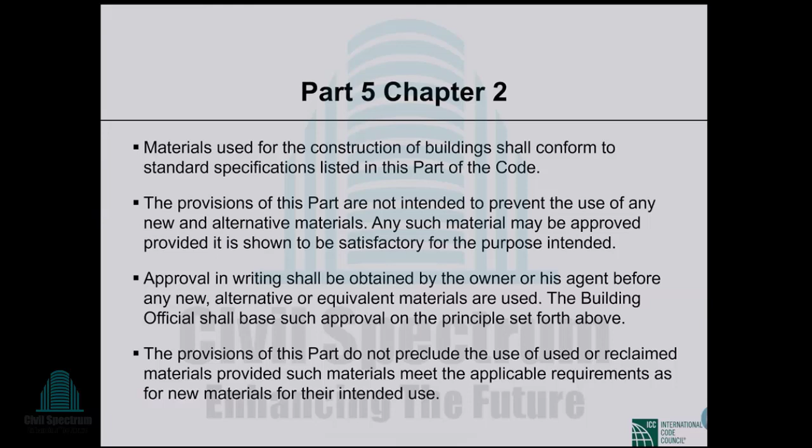Now I'll first discuss the constituents of concrete, the ingredients of concrete.

I'll start with the aggregates, fine and coarse aggregate. In the first paragraph, the standards are mentioned as they're mentioned in part 5, chapter 2. So we have some Bangladesh standard, ASTM, for normal weight concrete, normal weight aggregate, lightweight aggregate, and other types of aggregate like radiation shielding concrete, which we need for nuclear power plants, etc. Both ASTM and Indian standard are also mentioned there.

So basically we follow ASTM C33. We'll discuss on that, but it's a very common criteria that has to be followed.

This is the second one, nominal size. Nominal maximum size of coarse aggregate shall not be larger than certain limits. This is textbook information, we all know this, but it is specifically mentioned in the code, even in ASTM C33. Again, it is mentioned in 2 places in our building code: part 5, chapter 2, and part 6, chapter 5.

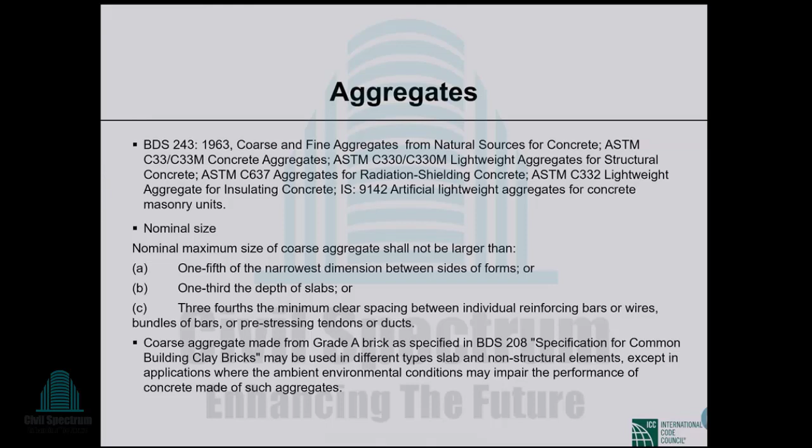Now let's talk a little about ASTM C33 for fine aggregates. These conditions are there that the deleterious materials should not exceed these limits. Like clay lumps and friable particles should not exceed 3% of the mass. Coal and lignite, where surface appearance of concrete is of importance, should not exceed 0.5%. All other concrete, 1%. In very few cases we actually do the tests to check if the deleterious materials exceed these percentages, but for important structures we should.

Then the fine aggregate shall have not more than 45% passing any sieve and retained on the next consecutive sieve, and its fineness modulus shall not be less than 2.3, not more than 3.1. This is important. When we conduct the sieve analysis with standard size sieves, this condition ensures the fine aggregate should not be uniformly graded, that is, most of the aggregate particles are of similar particle size. In that case we call it uniformly graded, not well graded.

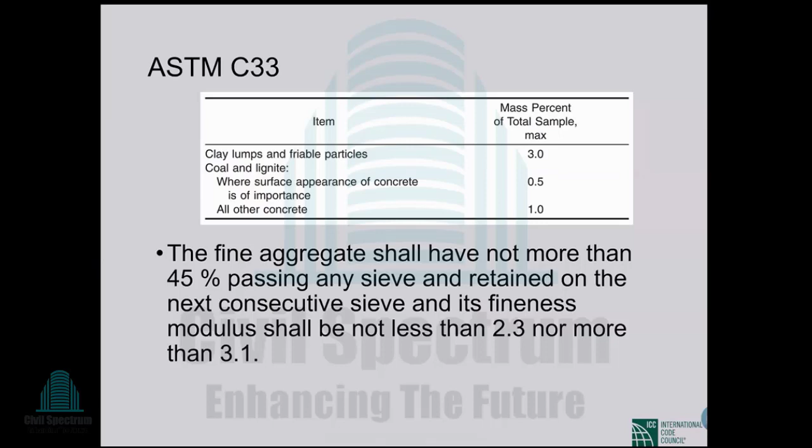Now in ASTM C33, there are different numbers related to coarse aggregate. There are different numbers of coarse aggregate.

In our case, they have wide variations in size. We usually use 20 milli downgrade size, and the gradation should follow the range among the sieve sizes. Or in some cases, we use half-inch downgrade or 12.5 milli downgrade, and the gradation should follow this as well.

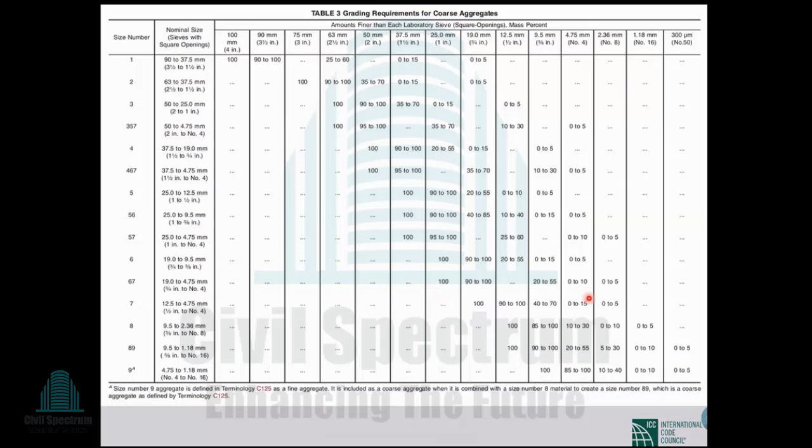But we seldom check this. In most cases, we use a crushing machine to break the coarse aggregate, which could be brickbats or stones. In many such cases, the gradation is not appropriate, so we should check the gradation by sieve analysis. So in brief, that was about the aggregates.

Of course, you have to check the aggregate quality, but you all know about those things, so I'm skipping that. The more important constituent ingredient is cement.

So what does the code say about cement? The code mentions both BDS standard and ASTM standards, that we can use cement made following these standards, so BDS or ASTM. In other words, we can test the cement following EN test specifications or ASTM test specifications. So if the cement passes any of them, the code says it's okay.

But there is a big problem. In Bangladesh, our BDS standard is BDS EN 197.1, meaning the manufacturers follow only this standard, not ASTM C150 or ASTM C595. But in the field or for designing, as we design following BNBC, which actually comes from ACI, we follow the American standards for design. So we want to test the cement following ASTM standards.

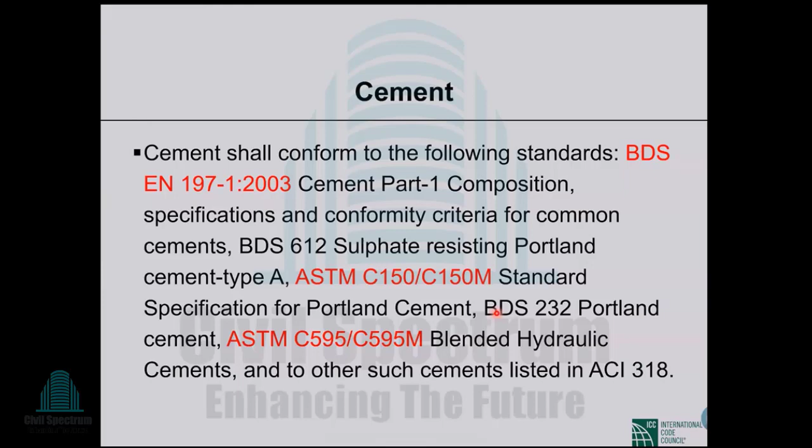So there is a gap. The manufacturers follow the EN standard, and the engineers follow the ASTM standard. So what are the differences in these standards? We'll talk about that.

In the BDS EN standard, there are 5 types of cement: CEM 1, 2, 3, 4, 5. But in our country, only two types are available, CEM 1 and CEM 2. CEM 3 has been used in the Rooppur nuclear power plant, but it's not usually available, and CEM 4 and CEM 5 have, I think, never been used in Bangladesh. So basically, it's CEM 1 and CEM 2.

CEM 1, Portland cement, is usually called ordinary Portland cement, OPC. CEM 2 is Portland composite cement, called PCC. These two types are mostly available in the market under different brand names.

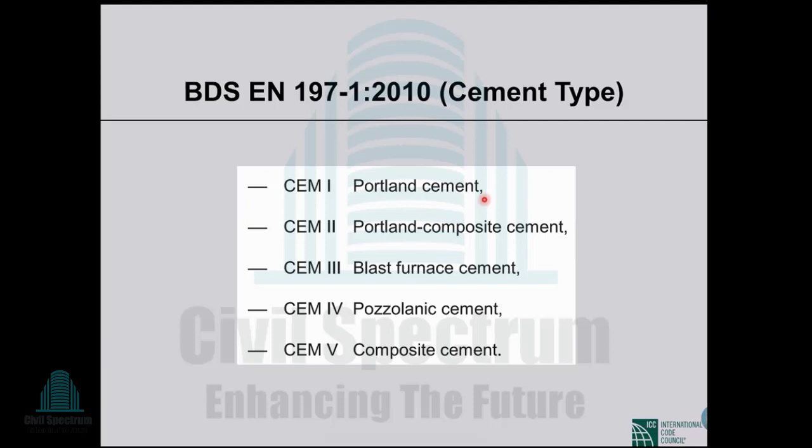So how do we classify CEM 1 and CEM 2? CEM 1, as mentioned, is ordinary Portland cement, containing mostly more than 95% clinker. This is the cement we used to have previously, produced from clinker as you've studied in your engineering course. In CEM 1, ordinary Portland cement, most of it is clinker with very few other additives.

But PCC, Portland composite cement, contains other types of additives. These could be blast furnace slag, silica fume, different types of pozzolans, different types of fly ashes, burnt shale, or limestone. In Bangladesh, Portland composite cement usually contains blast furnace slag, fly ash, and limestone.

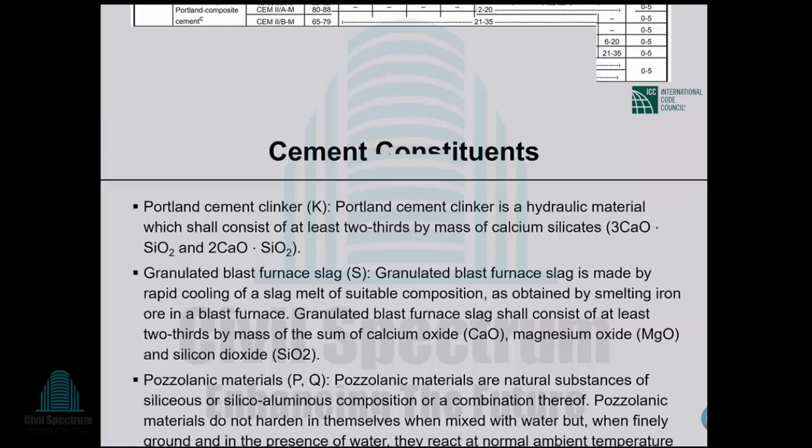I have added a few slides. Probably the version of slides you have downloaded from the web page doesn't have these slides. Anyway, these are just called from the BDS EN standard, so you'll find there too.

Portland cement clinker, what is this? In cement clinker, the major compounds are calcium silicates, so tricalcium silicate or dicalcium silicate. These are the major compounds in cement clinker, which is produced by burning different types of oxides with limestone. There is a fixed procedure and certain mix of ingredients that will produce clinker.

So this is cement clinker, granulated blast furnace slag. Now, what is blast furnace? We don't have blast furnace in Bangladesh. Blast furnace is the furnace which is used to produce steel from iron, iron that is extracted from ore. We don't have any iron ore in Bangladesh.

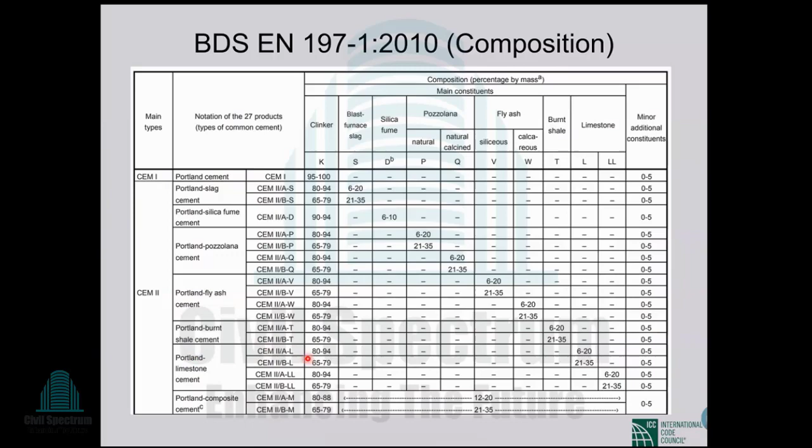Limestone - used in some types of cement. In many cases, the cements have limestone, where it is written VSL, L standing for limestone. Another kind of cement available in Bangladesh is called PLC, Portland lime cement, where the lime content is more. That is similar to CEM II A-L or B-L, that is Portland limestone cement, PLC, also similar but the main additive is limestone. One company in Bangladesh produces PLC.

So in case of limestone, there are some specific compositions required - calcium carbonate should be at least 75% in the limestone, and organic carbon should not exceed certain amounts for different types, for LL type and L type.

Silica fume is produced while manufacturing silicon. We don't have a silicon industry in our country, that's why we don't have silica fume, and it's not very cheap. So it is seldom used in cement manufacturing in our country.

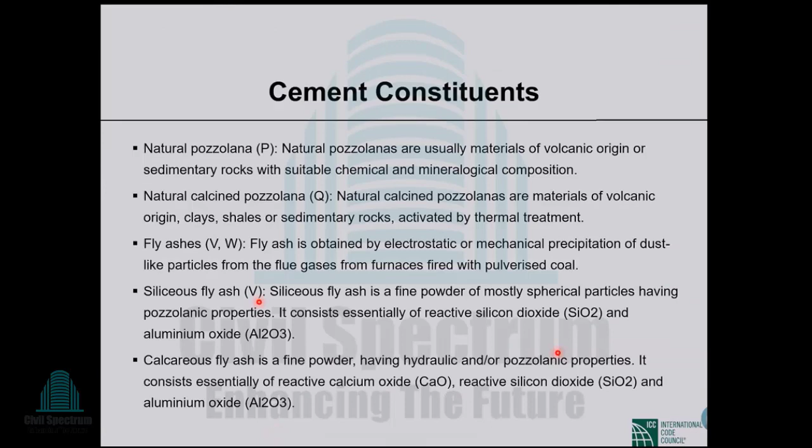So basically in Bangladesh, these additives are used: V, siliceous fly ash; S, which is blast furnace slag; and L, limestone. So these are the constituents.

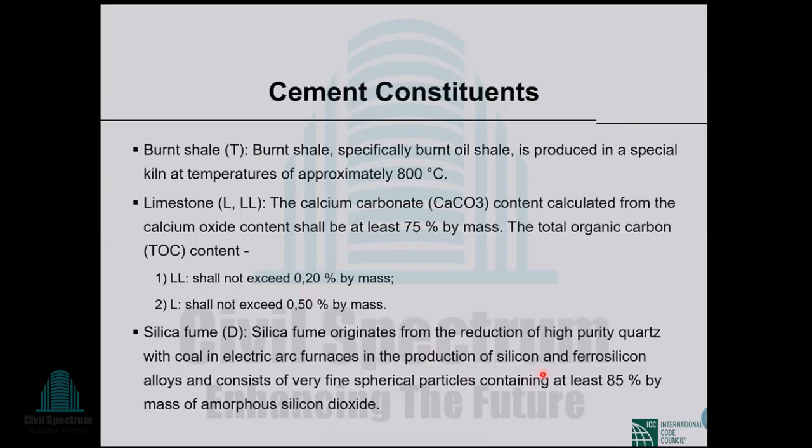Now, BDS-EN classifies cement in different strength classes: 32.5, 42.5, and 52.5. In European style, instead of a point, they use a comma. So 32.5, 42.5, these are the strength classes. In Bangladesh, both 42.5 and 52.5 strength classes are available.

And there are these letters N and R. What do they mean? In most cases you'll find this number, 42.5 N. N means normal or ordinary. R, we don't have R - R means rapid, for rapid early strength gain, this is the class, 42.5 R. For ordinary, when you don't need early strength gain, that is ordinary.

In some cases, only for CEM 3, there is another class denoted by L, which means low early strength gain. Blast furnace CEM 3 is blast furnace cement, Portland blast furnace cement. So in that type of cement, this low early strength gain type is available.

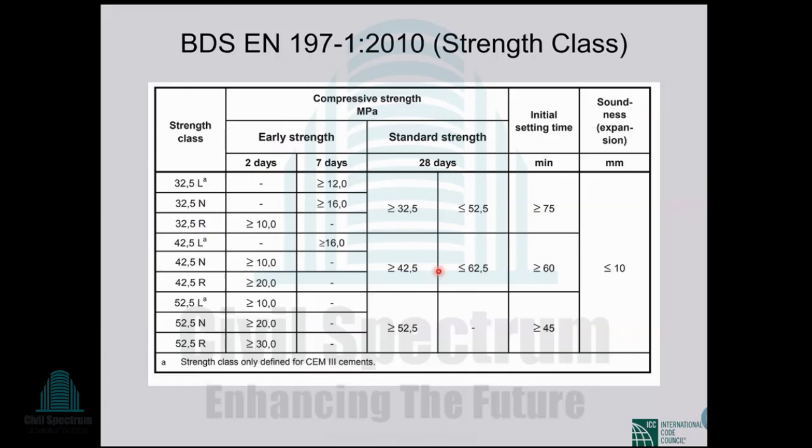Now, that was all about BDS-EN, but in practice we follow ASTM C150. In manufacturing, BDS-EN is followed; in design or construction, ASTM is followed. In ASTM, there are two standards - one is ASTM C150, another is ASTM C595. So what are the differences?

ASTM C150 is on ordinary Portland cement, OPC. It is just termed as Portland cement. ASTM C595 is actually related to what we call CEM2, that is Portland composite cement. In ASTM terminology they don't call it Portland composite cement, they call it blended hydraulic cement. So the terminology is different, but you can compare that with CEM2.

For ordinary Portland cement, there are many varieties mentioned in ASTM C150: Type 1, 2, 3, 4, 5, and all of them have another type like Type 1A, Type 2A, Type 3A, Type 4A.

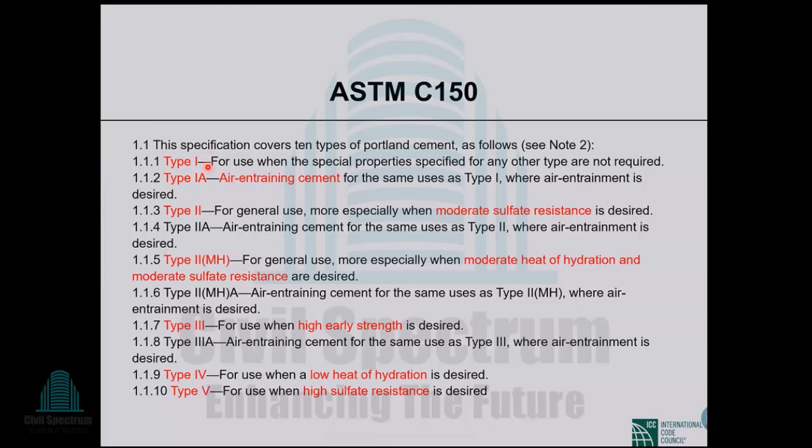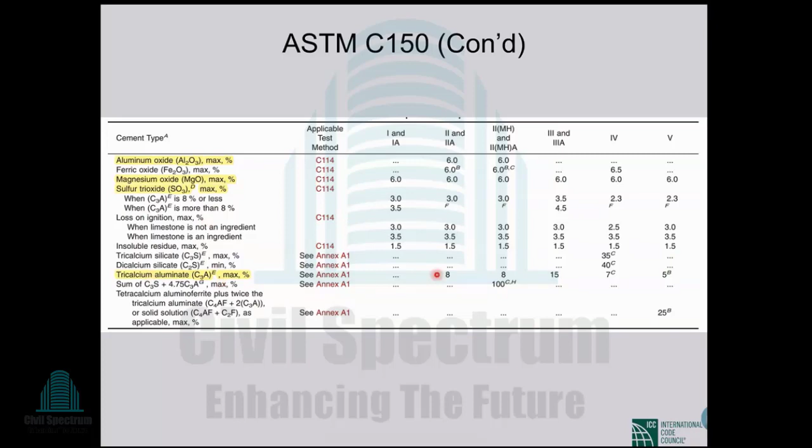Now the chemical composition of these different types of cement is specified as shown in this table. For Type 1, the maximum percentage of alumina, maximum percentage of magnesium oxide, or maximum percentage of other compounds are mentioned here, along with properties like fineness and expansion.

Among the properties, compressive strength is the most important one that is most often tested. In ASTM, both 3-day and 7-day strengths are specified for different types. For example, in our case, Type 1 is equivalent to CEM1.

In EN there are two varieties of CEM1, 42.5 class and 52.5 class. CEM1 is always 52.5 class, so the 28-day strength of CEM1 must be greater than 52.5 MPa. But in ASTM, 28-day strength is not specified; instead 3-day and 7-day strengths are specified. For Type 1, 3-day strength must be more than 12 MPa, and 7-day strength must be greater than 19 MPa.

So this is interesting. Another difference is the setting time. Both initial and final setting time are specified in ASTM, but in EN only initial setting time is specified; final setting time is not specified. In EN for CEM1, that is 52.5 strength class, the minimum limit of initial setting time is 45 minutes. Here it is the same.

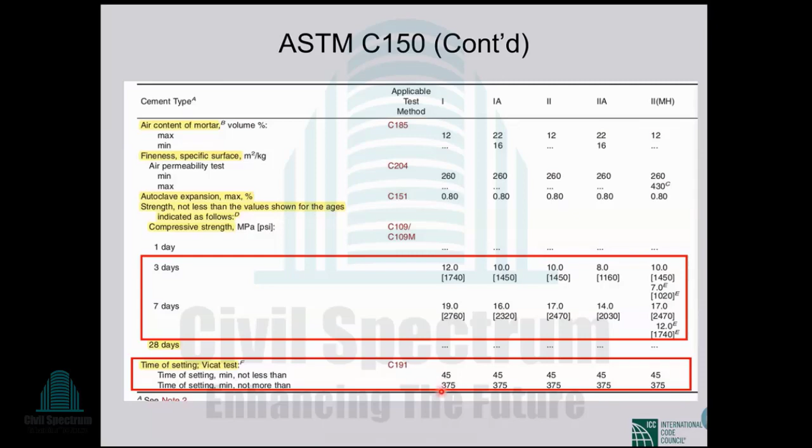We do a lot of tests in BUET. In many cases we find that even reputed cement companies have problems maintaining this final setting time, because in their manufacturing process they follow EN, and EN doesn't have any limit on final setting time. So when they test their cement according to EN protocols, they don't find any problem. But when those cements are tested following ASTM, strength-wise they usually don't face any problem, but the final setting time in many cases exceeds this value of 375 minutes. That is the problem.

ASTM C595 is related to blended hydraulic cement, which you can compare with CEM II according to the EN standard. In blended hydraulic cement, there are different types. In EN standard, you have CEM II A, CEM II B, and many variants depending on the additive, such as CEM II A-S, CEM II B-S, CEM II A-L, CEM II B-L, CEM II A-M, CEM II B-M, etc.

ASTM classifies these into 5 classes. Type IS is Portland blast furnace slag cement, where the slag constituent is between 25 and 70%. By slag, ASTM always refers to blast furnace slag, not any other type. So it should be between 25 and 70%, a very wide range. When slag is mixed with clinker and cement is produced, that is called Portland blast furnace slag cement.

Portland pozzolan cement is when other types of pozzolanic materials are used. The percentage of pozzolan can be from 15 to 40%, again a wide range. Portland pozzolan cement is for use when higher strengths at early ages are not required. That is like CEM II - you can compare with cements available in Bangladesh, which are 42.5N or 52.5N. CEM II most of the time is 42.5N, which you can compare with this type P, Portland pozzolan cement for use when higher strengths at early ages are not required.

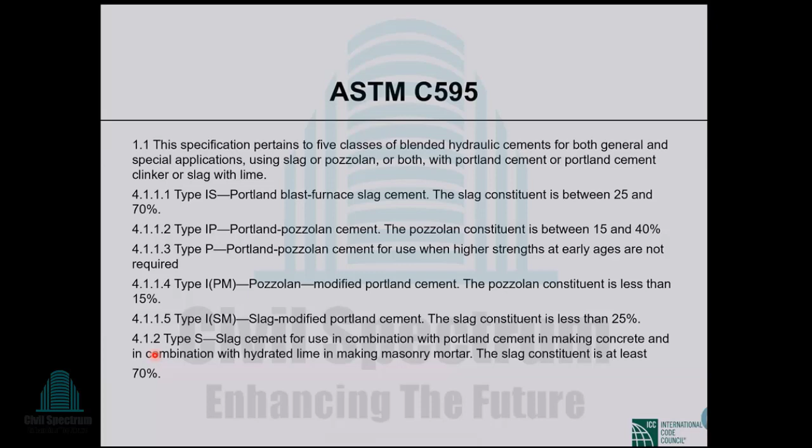So these are the different types of blended hydraulic cements that are specified. Now, blast furnace slag, as defined in ASTM C595: blast furnace slag shall be the non-metallic product consisting essentially of silicates and aluminosilicates of calcium and other bases, developed in a molten condition simultaneously with iron in a blast furnace. So while producing steel from iron extracted from iron ore in a blast furnace, the molten impurity on top of the steel - that is blast furnace slag.

Pozzolan shall be a siliceous or siliceous and aluminous material, which in itself possesses little or no cementitious value, but which will, in finely divided form and in the presence of moisture, chemically react with calcium hydroxide at ordinary temperatures to form compounds possessing cementitious properties. So it doesn't naturally have cementitious properties, but in certain conditions when there is moisture, it reacts with calcium hydroxide - this is called pozzolanic property. Hydraulic property is when a compound gains strength just by coming in contact with moisture. Pozzolanic property engages in chemical reaction with calcium hydroxide, creating a compound which has strength.

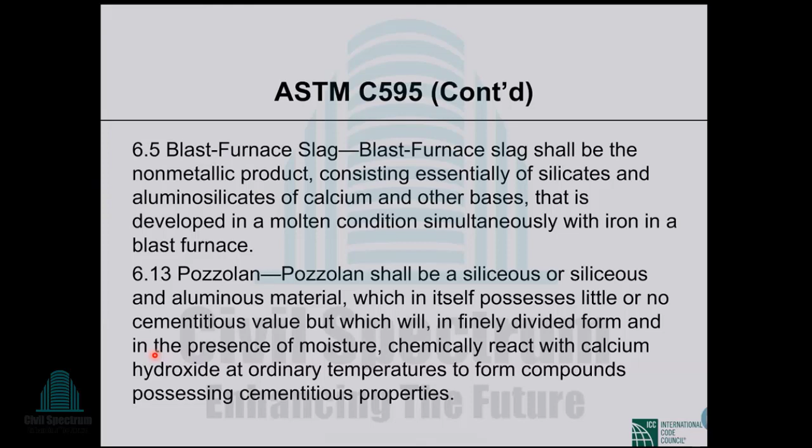So for ASTM C595, we can compare the standards: BDS EN CEM I we compare with ASTM C150 type 1, and for CEM II we compare with ASTM C595 type I, S or P. So if we compare the properties as mentioned in ASTM C595 and BDS EN CEM II type cement...

For setting time, ASTM provides limits for both initial setting time and final setting time. The initial setting time is 45 minutes, a little bit more strict than... sorry, actually EN is more strict here. In EN standard, for 42.5 strength class, the initial setting time must be more than 60 minutes. But in case of ASTM, if it's more than 45 minutes, then it's okay. The problem was the final setting time - final setting time must be less than 7 hours, which is 420 minutes.

But in the EN standard, there is no limit for final setting time. So even for CEM2 type of cement, many companies struggle to achieve this property for their cement. And compressive strength...

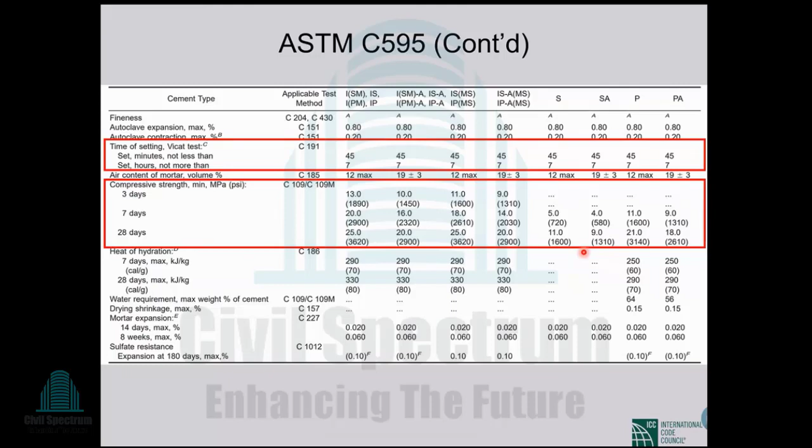So these are all about cements, two different standards, BDS EN and ASTM. Now let's talk about other ingredients.

Water, very simple. In our textbooks we always learn that water must be potable, that is drinkable. Only potable water can be used in concreting. But the code also says water used in mixing concrete shall be clean and free from injurious amounts of oils, alkaline salts, organic materials, or other substances that may be deleterious to concrete or reinforcement.

Then it says non-potable water shall not be used in concrete unless certain conditions are satisfied. So usually we will not use non-potable water; we'll always use potable water. But in certain cases we can use non-potable water - selection of concrete proportion shall be based on concrete mixes using water from such source.

So in mix design, we have to use that water and test if the properties of concrete are okay or not. Mortar test cubes made with non-potable mixing water shall have 7-day and 28-day strengths equal to at least 90% of strengths specified for similar specimens made with potable water. So if our water quality is non-potable, we can make mortar cubes with it.

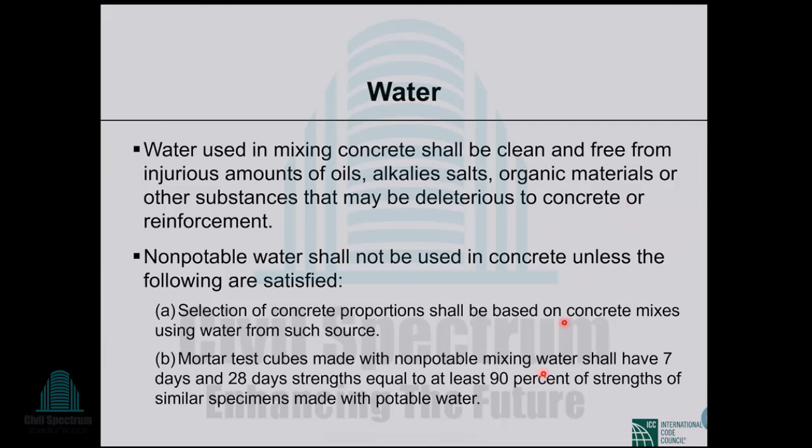Understandably, but this one holds - there shouldn't be any alkaline salt or other deleterious material. Okay, and that was about water.

Now this is another very important topic, reinforcement. So although the title of today's presentation is concrete materials, we cannot use concrete without reinforcement. So naturally reinforcement is relevant. We'll cover some important information regarding reinforcement that is mentioned in the code.

So metal reinforcement, actually steel reinforcement. Modulus of elasticity, we always take it as 200 gigapascal. That is universally true, yes.

Then the standards - again the same problem we have with reinforcement. The Bangladesh standard is based on ISO 6935-2. But the code also talks about ASTM A615. So we'll compare these two standards.

For rebars having yield strength more than 410 megapascal, that is 60 ksi or 60,000 psi, the Fy should be the stress corresponding to a strain of 0.35%. Okay, so this is what we call the offset method. By that method, we have to calculate yield strength while conducting tests.

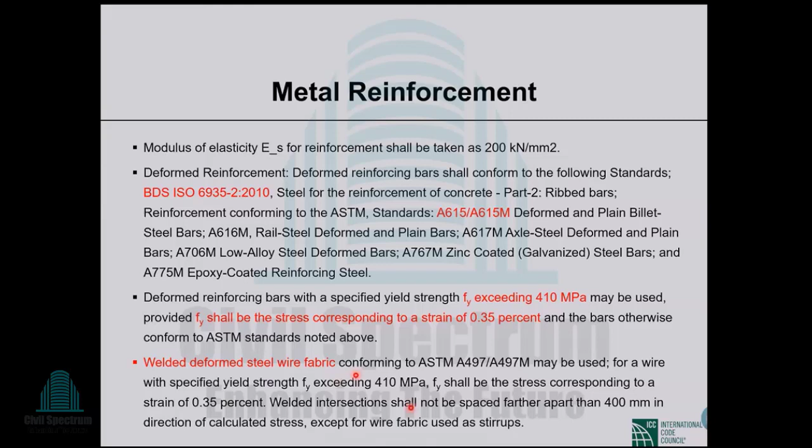So now let's talk about the standards. Our standard is based on ISO, adopted from ISO, BDS ISO 6935-2, for the bar sizes. These are the standard bar sizes according to ISO: 6 milli, 8 milli, 10 milli, 12 milli, 14 milli, 16 milli, 20 milli, 25 milli, 28 milli, 32, 40, 50.

Remember, some dias are missing here - like in some cases we used to have 19 milli, 22 milli. Those bar dias are missing in the ISO standard. In the ASTM standard, you will find 19 milli, 22 milli, etc. So the bar sizes according to ISO are different from those of ASTM. Here, the nominal cross-section area is given, and the weight, mass per unit length.

Sometimes some fresh engineers ask how can we measure the diameter, or if in the test report the diameter is a little bit less than the nominal bar dia, is that a problem? Remember, for deformed bar, we cannot exactly measure the bar diameter because there is a rib. So in some places the bar diameter is more, in some places it is less - it depends how you hold the slide calipers on the rib. So actually you never measure bar diameter directly.

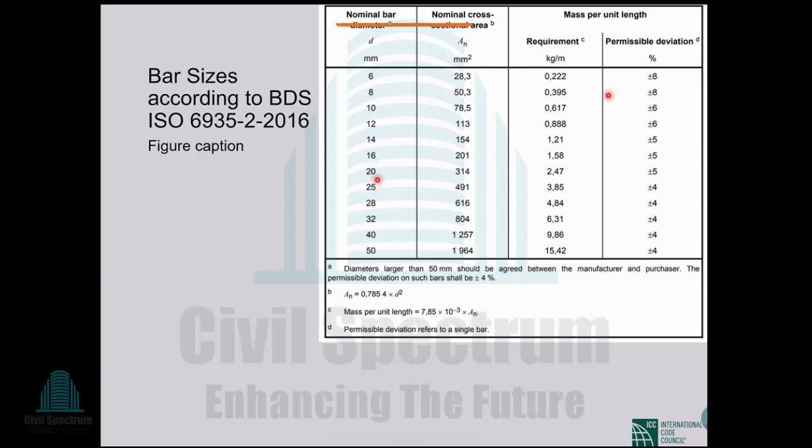That's why this is called nominal. The most important thing is mass per unit length, so measure the weight per unit length, usually for 1 meter. This is the weight, and the code tolerates this amount of deviation. If the weight is a little less, for smaller bar diameters, if it is less than 8% or more than 8% of the standard weight, then that tolerance is okay. But if it is less, you will always check the weight per unit length. If the weight is less than this tolerance, then that is a problem. Otherwise, just from the bar diameter you cannot make any assessment. Usually the diameter, if you convert from area, is always a little bit less than the nominal bar diameter, but this weight is important. So always compare the weight.

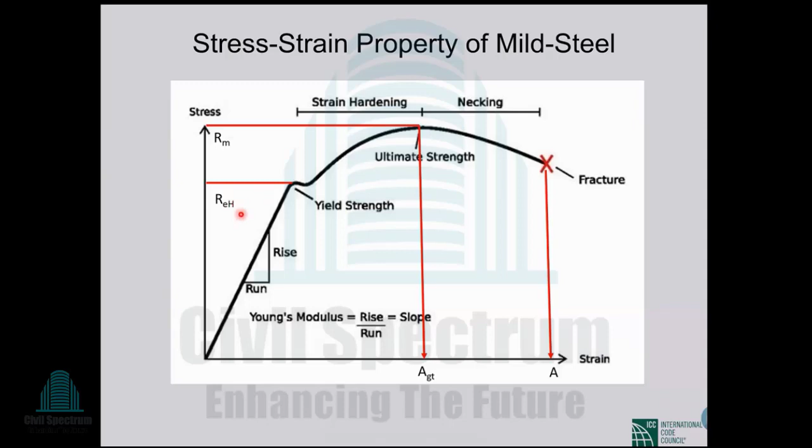But ISO doesn't define ductility in this way. It is found that the ratio Rm divided by Reh, that is ultimate strength divided by yield stress, in ASTM terminology is called the TY ratio, tensile strength divided by yield stress. This TY ratio, or Rm divided by Reh ratio, is found to correlate such that if this ratio is high, the ductility of the steel is high. So instead of calculating ductility in terms of strain, ductility is defined in ISO in terms of this ratio, Rm divided by Reh, or Ty ratio. For ductility class A, this Rm divided by Reh is 1.02, only 2% more than yield stress. Ductility class B is 1.08, ductility class C is 1.15, and ductility class D is 1.25.

In ductility class D, there is a maximum limit of ultimate strength. Ultimate strength cannot be more than 1.3 times the yield stress. So that is another point. Ductility class is all about this ratio, how ductile the steel is.

That's why we find in the market two types, B500C and B500D. B500C corresponds to ductility class C, where the ultimate strength by yield stress ratio is more than 1.15 but less than 1.25. For ductility class D, the ultimate strength by yield stress ratio is more than 1.25, for B500D or 420D. So the letters C and D represent ductility class.

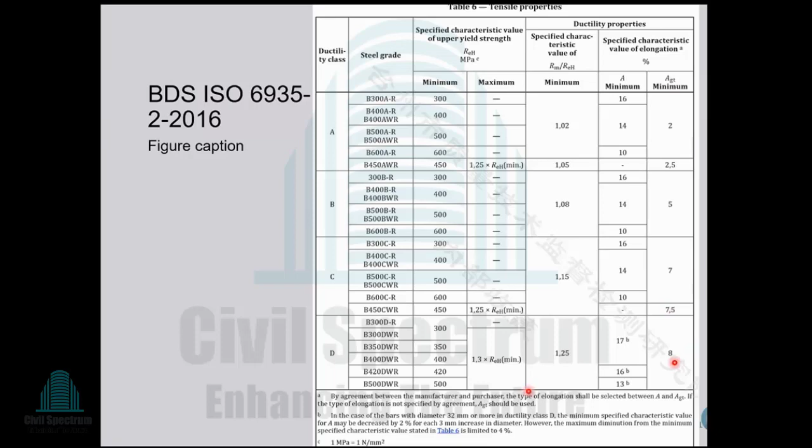So now we understand the BDS ISO standard. What about ASTM? Let's see the standard sizes in ASTM, according to ASTM A615.

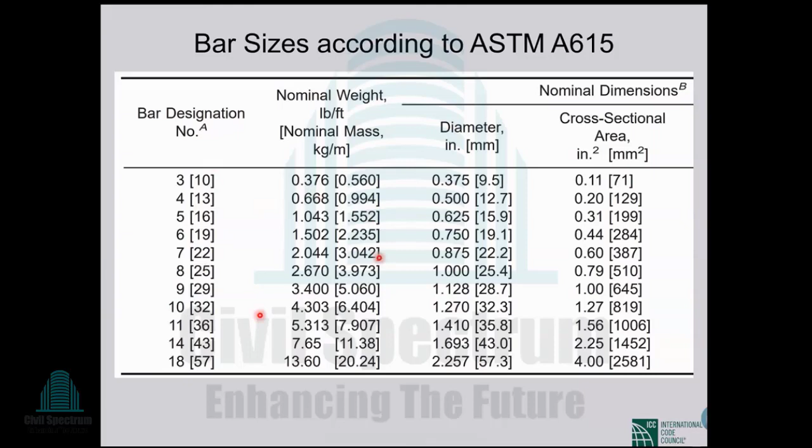So the standard sizes are different between ISO and ASTM. In our market, you will always find ISO standard because the manufacturers follow BDS ISO. So here again, nominal weight is important rather than the bar diameter, and their tolerances for weight are also mentioned in ASTM.

Now for grade, in ISO we have seen 300 megapascal, 400, 420, 500, etc. In ASTM, according to A615, this is one standard - there is another standard of ASTM, we'll go to that later. But according to ASTM A615, there are 3 grades. Grade 40, you see, 280 megapascal, less than 300. Grade 40, grade 60, which is 420 megapascal - that's why in ISO we also have one B420.

And grade 75, which is more than 500 megapascal, 520, because 500 corresponds to 72.5 KSI. So there is a difference. The grade B500 steel that we find in the market doesn't correspond to any grade of ASTM.

So these are the grades and the minimum ultimate strength, tensile strength, and minimum yield strength, according to ASTM, mentioned in the standard. And the elongation for different bar sizes, the total strain - the minimum elongations are also mentioned for different grades of steel.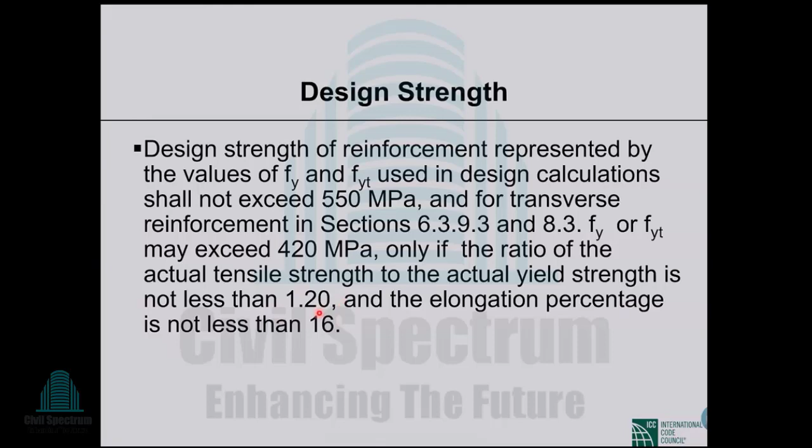Okay, these are some limits we should remember for design calculations. We have compared cement BDS EN standard with two ASTM standards, ASTM C150 and ASTM C595. And for reinforcing bar, we have compared BDS ISO 6935-2 with ASTM A615 standard.

Remember, I've been saying there is another standard, but why am I not introducing it? Because in Part 5, Chapter 2 of BNBC, that other ASTM standard is not mentioned, so I'm not introducing it yet. I'll introduce it where it is mentioned, in the seismic design part, detailing part. There I'll mention about that standard.

Now let's talk a little about admixtures. For air entraining admixtures, you can use air entraining cement, which is not available in our country, type 1A, type 2A, or you can use air entraining admixtures with ordinary Portland cement to make air entrained concrete, which has many advantages. For that, there is a specification ASTM C260.

These admixtures are most common in our country. Water reducing admixture, we use super plasticizer. Retarding admixture, we also use retarders in ready mix concrete, RMC. Accelerating admixtures, if we need high early strength, we can use them. There are admixtures that have both effects, water reducing and retarding.

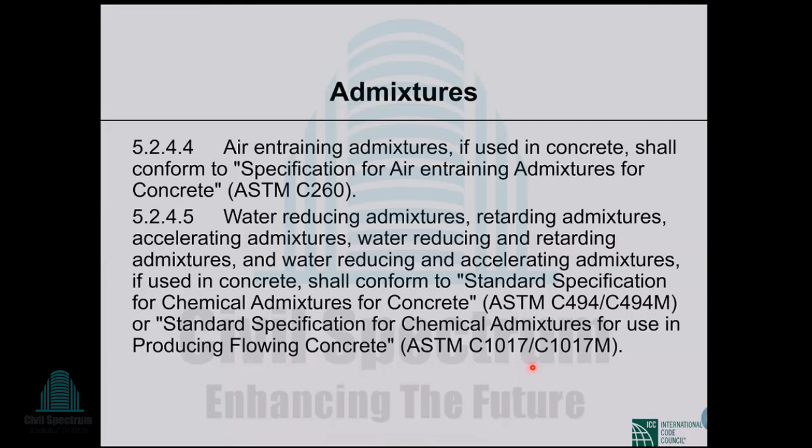Let's see what is in ASTM C494. There, the admixtures are classified into these 8 classes. Type A, water reducing admixtures, these are very common water reducing agents. By water reducing, we understand that with less water cement ratio, we can produce concrete with higher strength without compromising workability.

But these admixtures have a side effect, they retard the strength gain, so they delay the setting time. Retarding admixtures are those we intentionally use to delay setting time. For example, for ready-mix concrete, the concrete is mixed in the batching plant and transported to site, and during transportation, so that it doesn't set, retarding agents are mixed.

Accelerating admixtures: when due to some weather condition we want very fast setting time, early setting and fast strength gain, we can use accelerating admixtures. Water reducing and retarding admixtures have both effects, and water reducing and accelerating admixtures are the opposite type, that it accelerates while also reducing water demand.

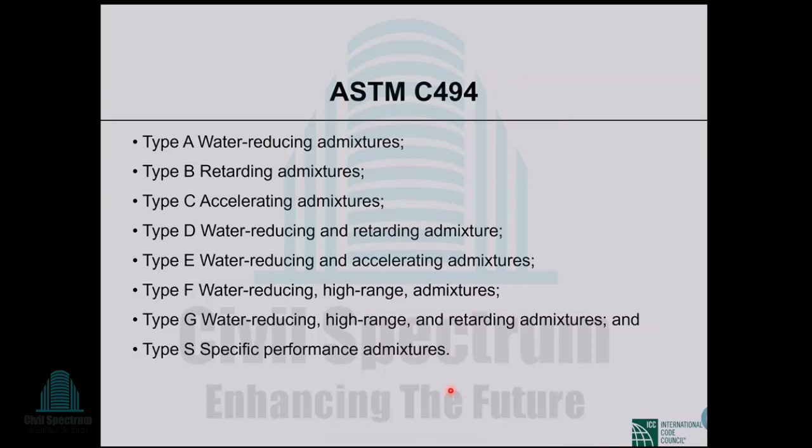Suggested workability, now back to BNBC 2020. For different placing conditions, different workability and degree of workability is mentioned. For heavily reinforced sections where we cannot vibrate, we need high workability. In terms of slump, 75 to 125 millimeters, 3 inch to 5 inches slump is recommended for 20 mm maximum aggregate size.

With lightly reinforced sections without vibration or heavily reinforced sections with vibration, medium workability is needed. In terms of slump, it is 25 to 75 millimeters, 1 inch to 3 inch slump.

But for low workability situations, concrete of lightly reinforced sections with vibration, or thin sections with vibration, where we don't need much workability, the recommended workability is not mentioned in terms of slump but in terms of VB time. VB apparatus is very common; using it, the concrete is similar to a slump test. You have a cone or frustum, you release it, and the fresh concrete stands, and you vibrate it.

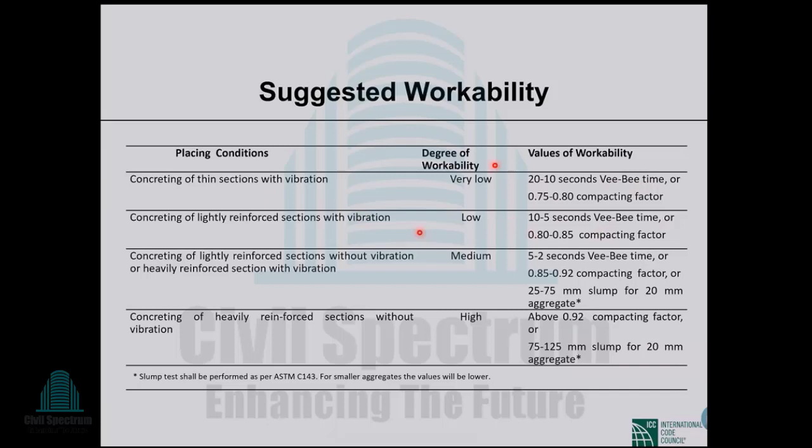So according to the code, these are the recommended values of workability.

Then, requirements for normal weight aggregate concrete exposed to sulfate containing solutions. So when there is a chance of sulfate attack, what are the requirements? How do we define sulfate exposure? Negligible, moderate, severe, very severe.

Water soluble sulfate in soil, percent by weight. So in soil, if the amount of water soluble sulfate is in this range, then we call it severe, or in this range, we call it moderate. And this is in soil, and this is in water.

In these situations, the cement type that is recommended is mentioned here. When there is sulfate exposure, like moderate, severe, very severe, ordinary Portland cement is not recommended. Other than ordinary, CEM I and B type, that is same 2A type cement is recommended.

So here this note is important: Pozzolan that has been determined by test or service record to improve sulfate resistance when used in concrete containing type 5 cement, that is different. Pozzolans can have a beneficial effect to reduce sulfate attack.

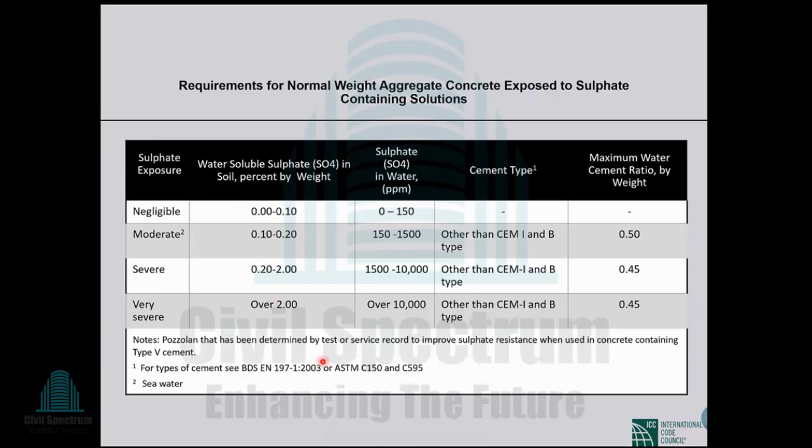Maximum water cement ratio is also mentioned here, not more than 0.5. So we should be aware of this, that we should test the soil if there is any chance of sulfate attack. That's very important. Then we can choose the correct type of cement.

Maximum chloride ion content for corrosion protection. Again, another test that we don't usually go for, but we should test for these for corrosion protection. Maximum water soluble chloride ion in concrete - so after making the concrete, we should check the concentration of chloride ion. If we are producing concrete for pre-stressing purposes, it shouldn't exceed 0.06%.

For reinforced concrete exposed to chloride in service, like marine environment, it shouldn't exceed 0.15%. Reinforced concrete that will be dry or protected from moisture in service, 1% may be okay. Other reinforced concrete construction, 0.3%, etc. So we should also check these, especially for marine environment or industrial environment, if the environment is corrosive.

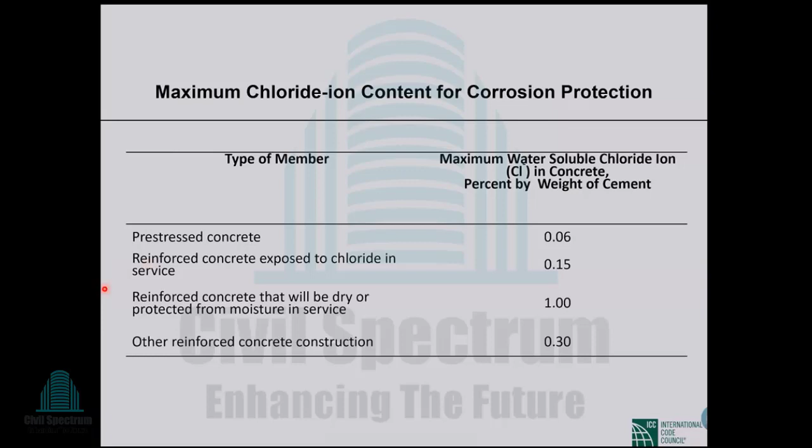Minimum concrete strength: according to BNBC, the minimum concrete strength is 17 megapascal. But we'll see there are exceptions, for seismic design this is not always true. So minimum concrete strength for structural use of reinforced concrete shall be 20 megapascal. However, for buildings up to 4-story, the minimum concrete strength may be relaxed to 17 megapascal.

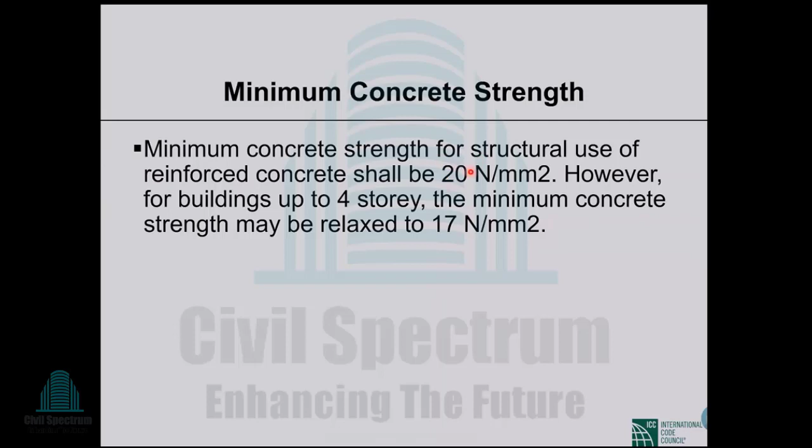So if your building is 4-storied or less, then you can go for 17 megapascal. Otherwise, the minimum strength must not be less than 20 megapascal. It is always better to go for higher strength concrete. Maximum permissible water cement ratio: depending on the strength of concrete, the prescribed water cement ratio is mentioned in this table of BNBC. So you can check it.

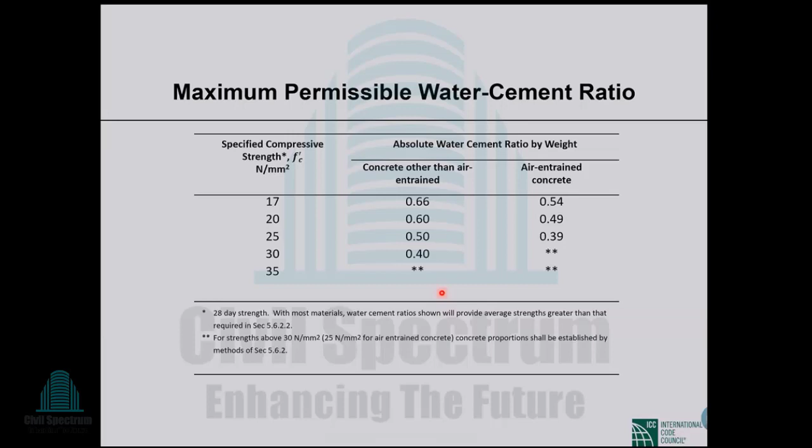Then let's talk about curing. Concrete other than high early strength shall be maintained above 10 degrees centigrade and in a moist condition for at least the first 7 days after placement, except when cured in accordance. Usually in practice, we don't remove the props before 14 days. If we are sure about the early strength gain, then we can remove it earlier, but usually that is the practice.

But according to the code, we must cure the concrete at least for the first 7 days, and we should maintain the environment so that the temperature is more than 10 degrees centigrade. For high early strength concrete, it shall be maintained above 10 degrees centigrade in a moist condition for at least the first 3 days.

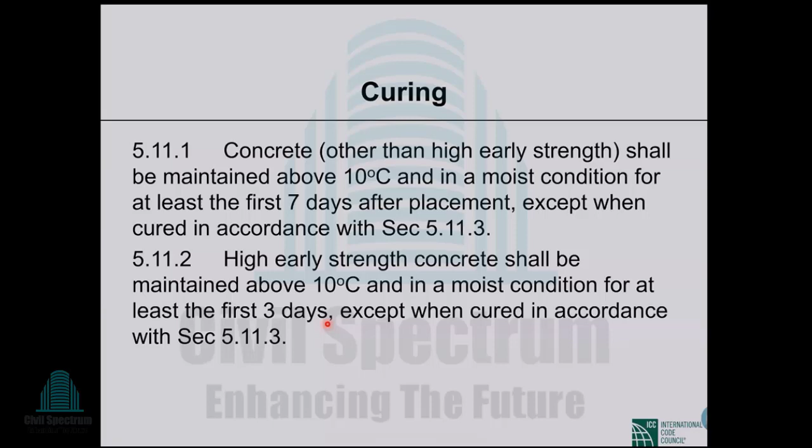So for high early strength concrete, if we choose our cement as early strength gain cement, and if we use some admixture like accelerating admixture, in that case we will produce high early strength concrete, and for that we can cure it only for 3 days at least. So that's the important thing about curing mentioned in the code. This I mentioned in my talk, which was the third session of this training program, where I mentioned what should be the frequency of testing of concrete.

What sets should we test during construction? The number one criterion is that once a day, every day you cast concrete, you have to take at least one set of cylinders. Even in the same day, if the volume of concrete is more than 60 meter cube, you have to take more sets. If it is say 100 meter cube, you have to take 2 sets. If it is say 150 meter cube, then you have to take 3 sets, and so on.

It also depends on the surface area, not only volume. If you are casting less volume of concrete but the area is wide, if it is more than 250 meters square, say like 1000 meters square, you have to take 4 sets of cylinders.

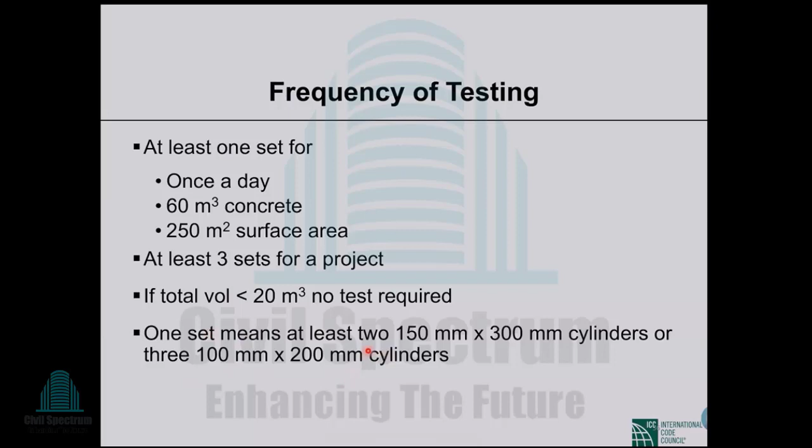Now, after testing, from the results, how do we interpret them? If for one set the test result is less than the design strength, does it mean we must demolish that casting? No.

The acceptance criteria will depend on whether the cylinders are cured in the laboratory or in the field. If cured in the laboratory, usually we cure test samples in a tub, submerged underwater. Under laboratory condition, the average of 3 sets must be greater than FC prime.

A single set may have an average value less than FC prime, but the average of 3 sets must be more than FC prime. The average of a single set may be less than FC prime, but not less than FC prime minus 3.5 megapascal, that is FC prime minus 500 psi.

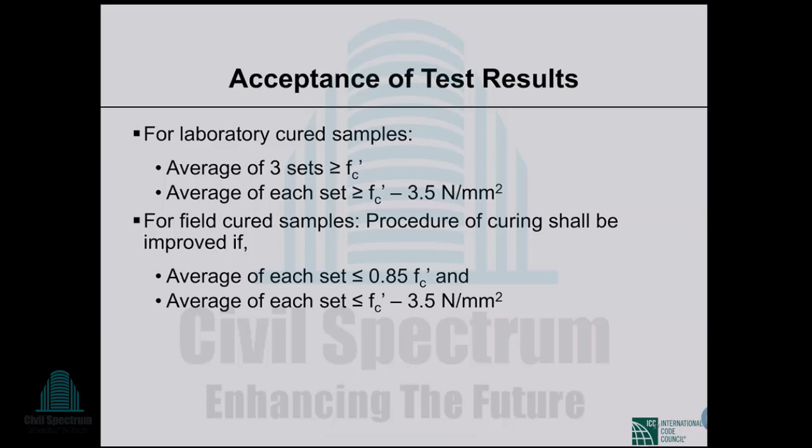The average of 3 cores, not sets - 1 core is 1 cylinder - and the standard size of core according to ASTM is 4-inch diameter, 100 millimeter diameter. If the core size is smaller, this criteria will not apply, as it would be too strict for a smaller diameter core. There is a lot of literature and standards in ACI that you have to study.

In BNBC, those are not mentioned, but for professional practice, you have to study those ACI standards and literature. For lower dia cores, this is for 4-inch dia, 100 millimeter dia core. So the average of 3 cores must be greater than 85% of FC prime, and each core must be greater than 75% of FC prime. That is, even the cores, each core need not be more than FC prime.

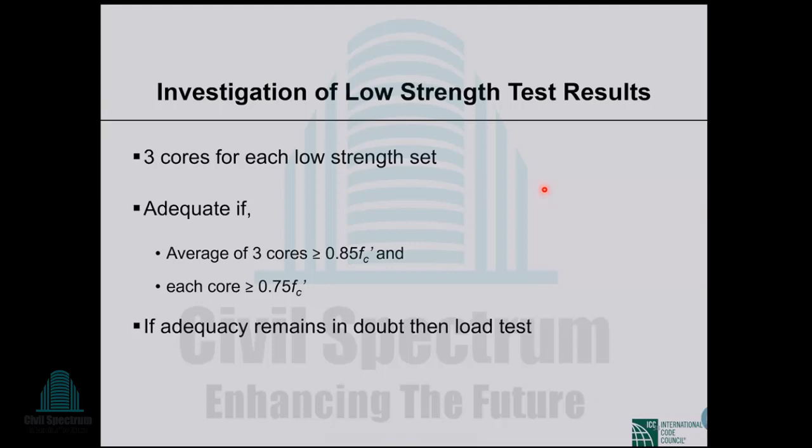There are many other topics in the code related to concrete. Most of that material, that information, is common. We usually know that information, and it's mostly textbook-like information. So I didn't

choose that information for today's presentation. But this one I felt important because in practical situations, I found violations of these provisions. These are related to conduits and pipes embedded in concrete. So you have a beam or slab. Under the beam, you have conduits or pipes. That is, we call it concealed pipe, for electrical wiring purposes or plumbing purposes when pipes are embedded in concrete.

So what are the provisions in the code? Conduits and pipes of aluminium shall not be embedded in structural concrete unless effectively coated or covered to prevent aluminium-concrete reaction. So we know that aggregates may react with aluminium compounds.

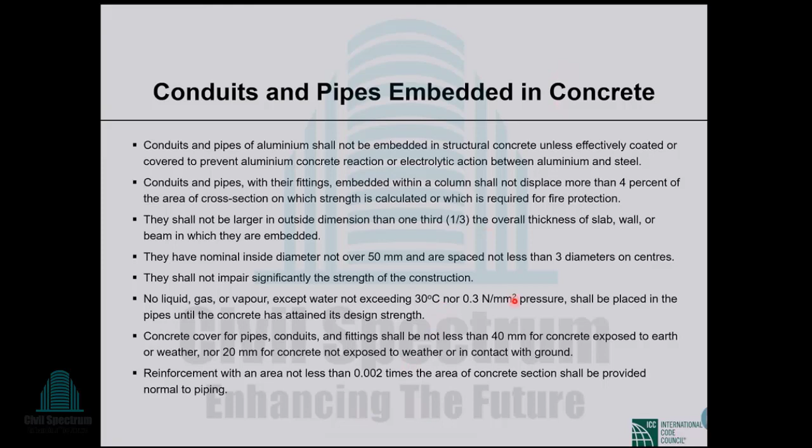So when the concrete surface is exposed to severe conditions, in Bangladesh, in most cases outside, the concrete is always exposed to severe rain. So in Bangladesh, this is the normal condition, a severe condition.

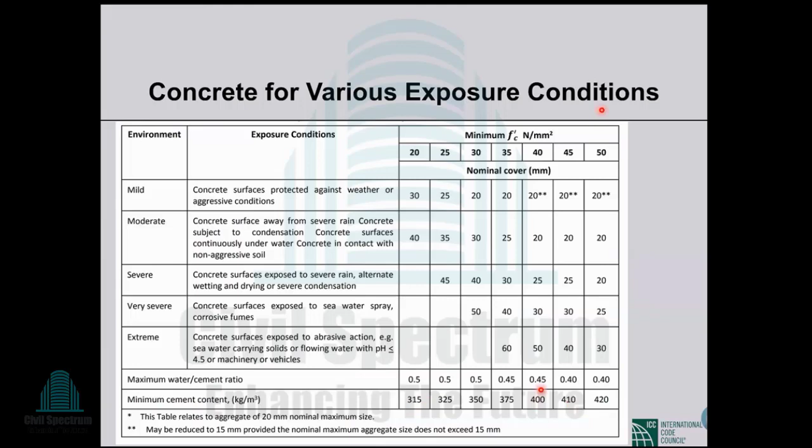Now, concrete in special moment frames. So now we'll discuss the seismic design. Last time I mentioned the seismic design category that has been introduced in the new BNBC 2020. Depending on the seismic zone, soil type, and occupancy type, we are allowed to construct structures of a specific seismic design category.

For example, in Dhaka, if the soil condition is good, we can go for seismic design category C. If the soil condition is not good, we have to go for seismic design category D. In seismic design category D, we are not allowed to construct or design intermediate moment frames or ordinary moment frames; we must go for special moment frames. There are exceptions, like in the case of a dual system with special walls, we can have an ordinary frame, but usually we have to go for special moment frames.

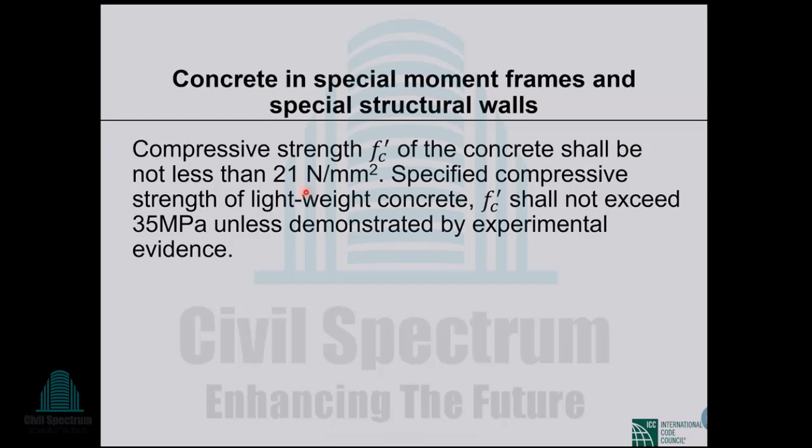More restrictions apply for special moment frames and special structural walls. The code states: deformed reinforcement resisting earthquake-induced flexural or axial force, or both, shall comply with ASTM A706 grade 420. Previously we talked about ASTM A615; this is another new standard, ASTM A706. Here in the detailing chapter, part 6, chapter 8, while discussing special moment frames and special structural walls, this ASTM standard is mentioned. We'll see what is in this standard. Grade 420 megapascal steel can be used.

It must comply with these. So for special moment frames and special structural walls, grade 420 of ASTM A615 cannot be used. ASTM A706, alternatively, only BDS ISO 6935-2 grades 300, 350, 400 and 420, or ASTM A615 grades 275 and 420 reinforcement shall be permitted.

Now I will tell you a different story. The story is recent. But before going to that story, let's talk about ASTM A706. This standard - we have talked about ASTM A615 - this standard is different.

Here we have grade 60, that is 420 megapascal, and grade 80 rebar, 550 megapascal. Remember, in our design, according to BNBC, we can never take any design strength more than 550 megapascal - so this is that grade 80. But for special moment frames and special structural walls, we cannot use a grade higher than this, even in this standard, ASTM A706. We cannot use grade 80 according to BNBC 2020.

And these are the limits for tensile strength, yield strength and elongation - this is important. This is the difference between ASTM A615 and ASTM A706: the metallurgical composition is clearly defined - the other elements besides iron, what should be their proportion and percentage. In ASTM A615, only phosphorus is defined, that it cannot be more than 0.06%, maybe one other element, but these are not clearly defined like in ASTM A706. In ASTM A706, the metallurgical composition is clearly defined.

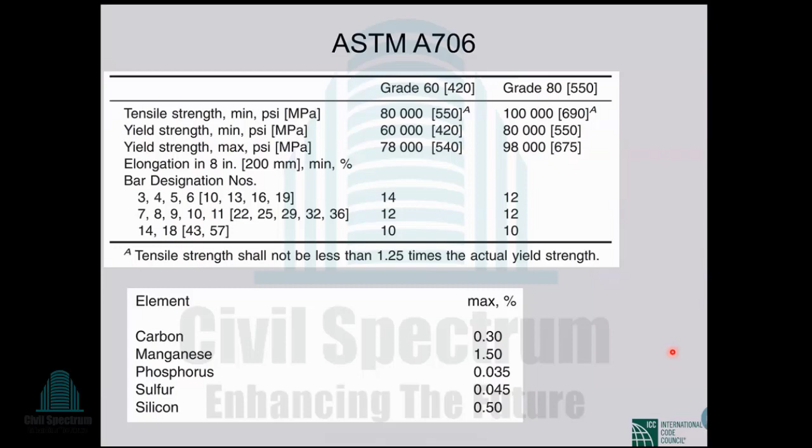Grade 60 according to BNBC 2020. However, now, as I told you, I will tell you a different story. The story is this one, ACI 318-19. I told you in the third session of our training program that...

BNBC 2020 was actually written in 2010, and for concrete it followed ACI 318-08, which was published in 2008. The conditions in ACI 318-08 for designing special moment frames and special structural walls were quite restrictive. ACI 318-08 didn't allow the use of higher grade steels. The highest grade steel that could be used was grade 60, or 420 megapascal.

But ACI 318-19 tells a different story. Starting with ACI 318-19, ASTM A706 grades 80 and 100 reinforcement is permitted to resist moments, axial and shear forces in special structural walls and all components of special structural walls, including coupling beams and wall piers. So for special structural walls, ACI 318-19 allows you to use grade 80 and even grade 100, produced according to ASTM A706. ASTM A706 grade 80 reinforcement is also permitted in special moment frames.

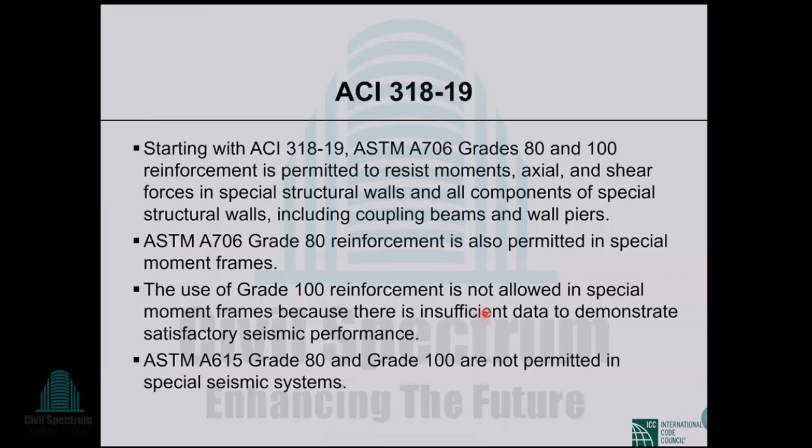Now, another important condition - this is not directly related to concrete material, but more related to the detailing part of seismic design. Still, I want to emphasize this. This is related to welding of rebars for seismic special moment frames and special structural walls. Reinforcement required by factored load combinations which include earthquake effect shall not be welded.

So the reinforcement that you are providing for wind load, this restriction doesn't apply to that. The reinforcement needed to carry earthquake load - this restriction is imposed on that, meaning you cannot weld the longitudinal rebars needed for sustaining earthquake load. In addition, welding shall not be permitted on stirrups, ties, inserts, or other similar elements to longitudinal reinforcement required by design. So you cannot weld your tie with the longitudinal rebar, or weld the stirrups with the longitudinal rebar of your beams.

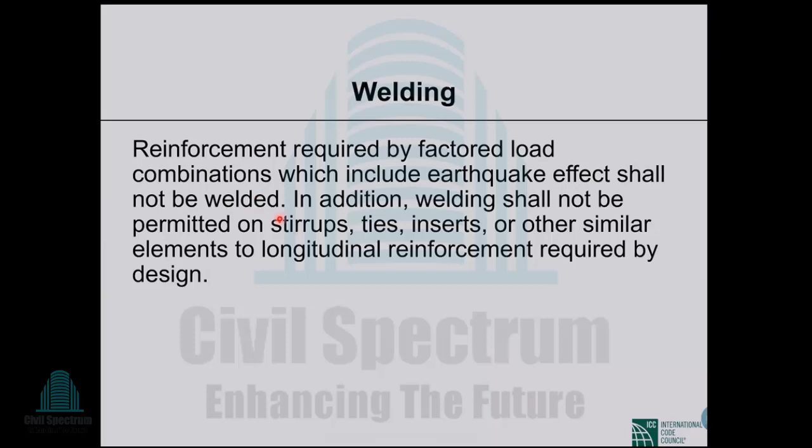So this is important from a seismic design point of view. I think that's all I have. Oh no, there's one more thing - shotcrete.

This has been newly introduced in BNBC 2020. Although the technology is not new - in other countries it's used quite extensively - we didn't have this topic in BNBC 1993. So this was included in BNBC 2020: shotcrete.

What is shotcrete? You can see in this GIF image - you shoot the concrete onto a wall for tunnels and many other purposes. This is quite convenient; you can shoot completely flowable concrete and make a surface. Shotcrete shall be defined as mortar or concrete pneumatically projected at high velocity onto a surface. The different specifications and prescriptions for shotcrete are mentioned in part 6, chapter 5 of BNBC 2020.

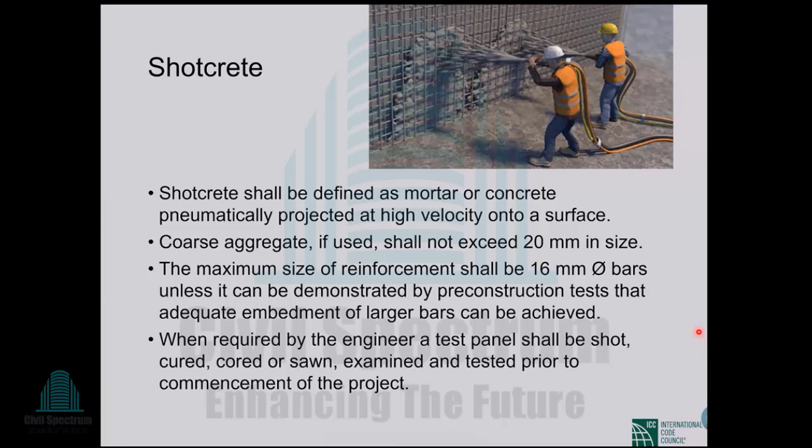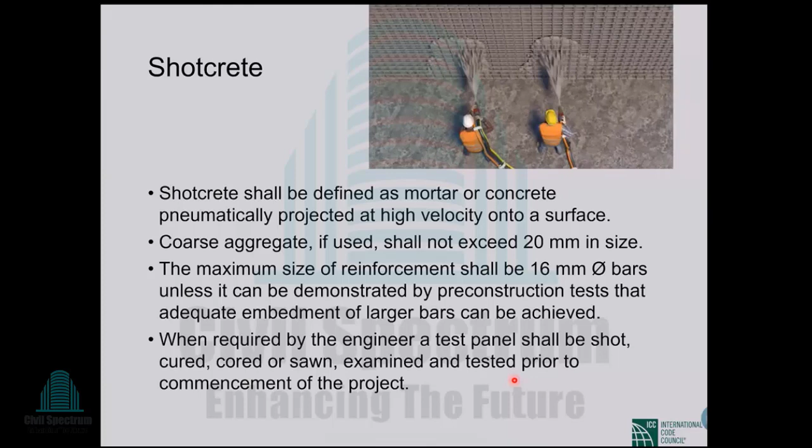The maximum coarse aggregate size is 20 millimeters normally; the maximum bar size is 16 millimeters. Usually a test panel is made, and that panel is tested in the laboratory to determine the load capacity of shotcrete walls. So this is something new that has been introduced in BNBC 2020.

One more topic, from part 7, chapter 3, that is storage. Part 7 is related to construction practices, and there is one chapter, probably chapter 3, related to how we can store different construction materials. So there, how we can store cement, that is mentioned.

So this is quite a long section, but I have extracted only some important points. Cement is to be stored at the work site in a building or shed which is dry, leak-proof, and moisture-proof. This is common knowledge, so we always do that.

Bags are to be stacked on wooden planks, maintaining a minimum clearance of 200 millimeters from the floor. So we don't just put cement bags on the floor; we put them on a platform, which may be wooden plank or other material, but the clear distance from the floor should be 200 millimeters, about 8 inches.

Maximum height of the stack shall be 15 bags, and the width not more than 4 bags or 3 meters. So we can stack bags on top of one another, but the total height must not exceed 15 bags.

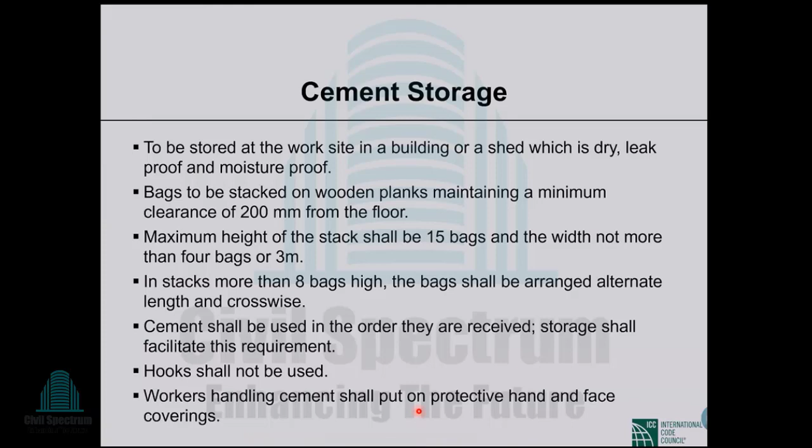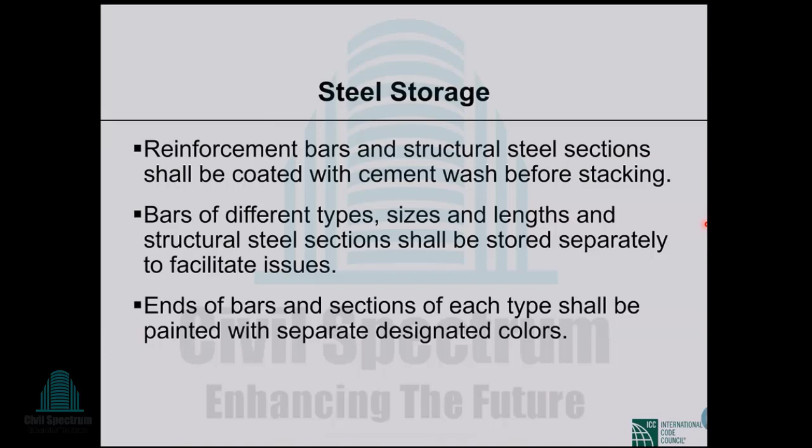Ends of bars and sections of each type shall be painted with separate designated colors for ease of identification. So that's all I think I have. If you have any questions...

To summarize, today we talked basically about concrete materials, and while talking about concrete materials, we had to address reinforcing steel. So we talked about different standards mentioned on cement and steel and compared them. That was the main purpose of today's talk. Thank you so much.